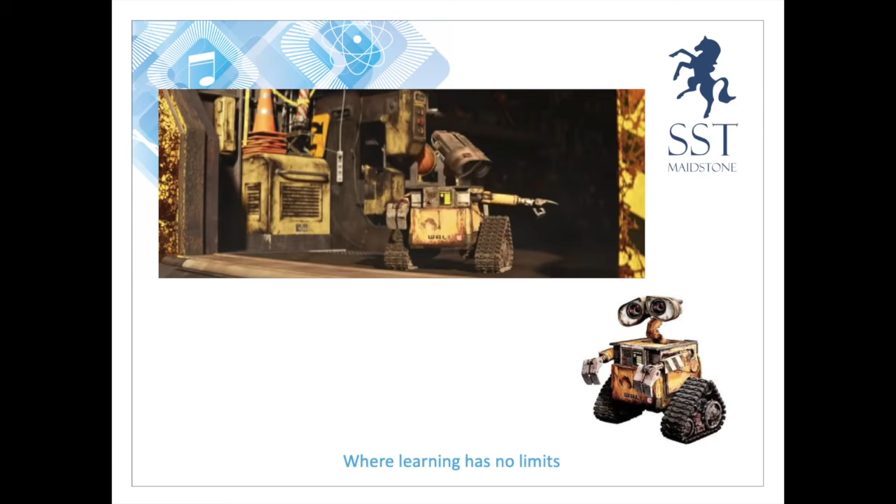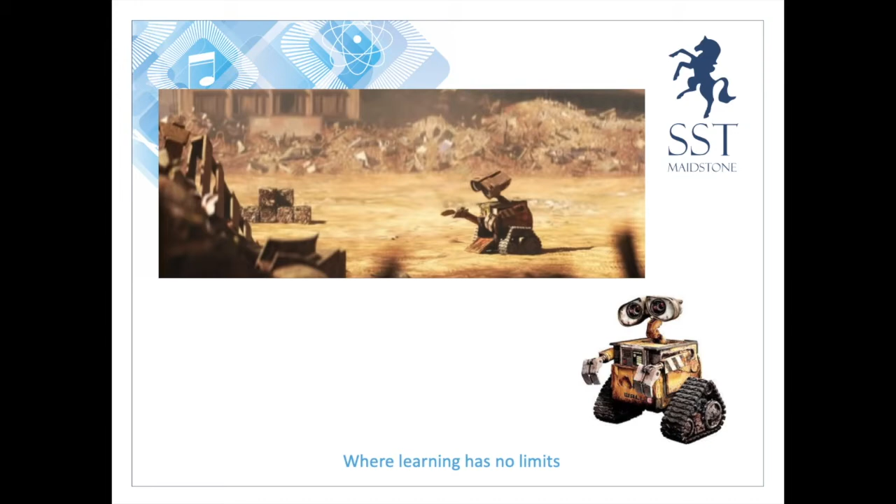This little robot is the last of his kind, and humans, in this imaginary future, messed up the planet so much that they went off in a spaceship and left it. They left these robots to clear up all the junk, and you can see WALL-E is making these cubes of junk and trying to tidy up. But unlike all the other robots, WALL-E's actually got a personality, and you can see he's interested in things, he's got a sense of humour, doesn't always know what has value and what doesn't. So if he finds something like a diamond ring, he might throw it away, as you'll see in a second. Doesn't know that the diamond's worth anything. Thinks the box is much more interesting because it has a flap on it.

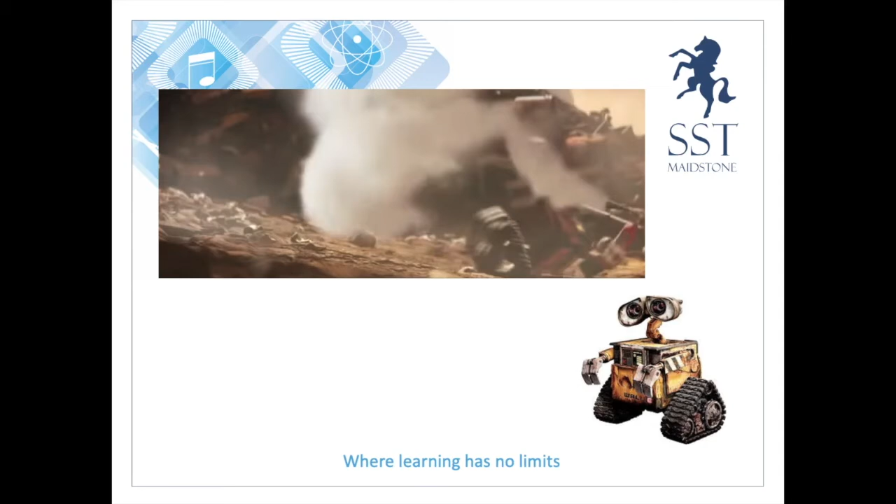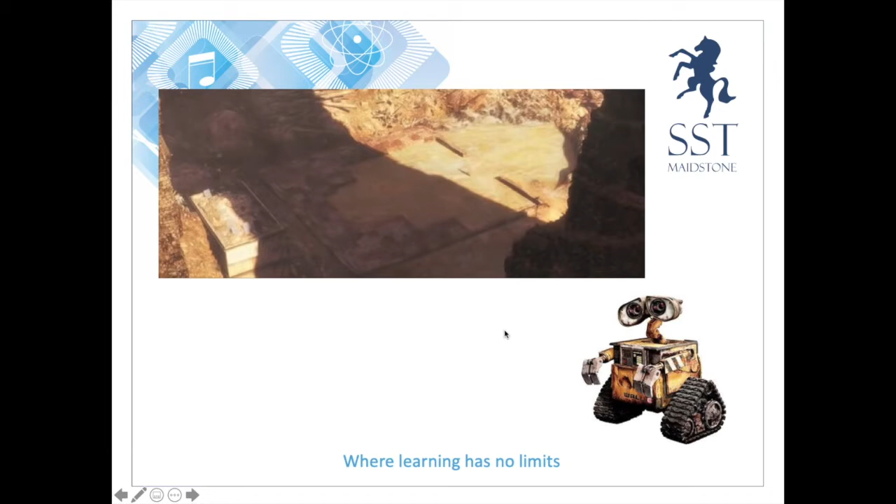WALL-E's building this massive big tower of these blocks, and he's not being affected by the pollution because he's a robot. So unlike a human being who might feel ill or have breathing problems or something, look at WALL-E continually building his tower of blocks, working all day, not needing a weekend, not needing tea breaks or anything like that.

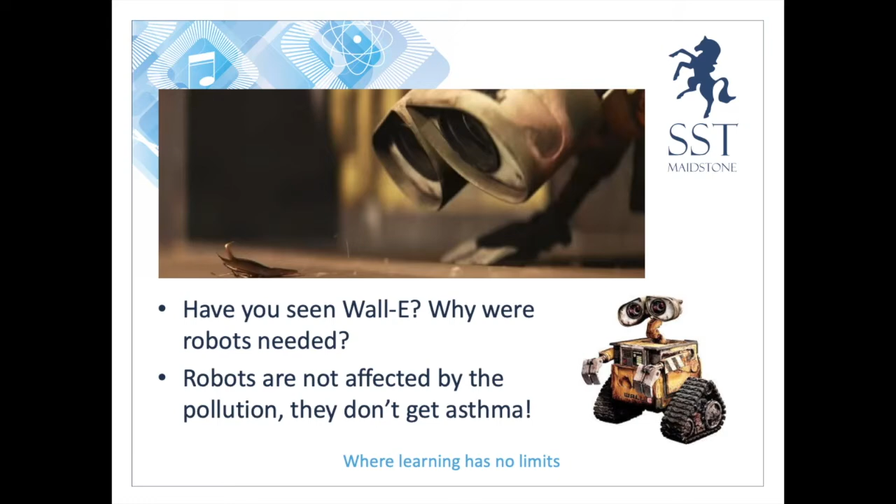So the advantage of using robots is that they're not affected by things like pollution. They don't get asthma, they don't have skin that's sensitive to different chemicals and things. So sometimes we use robots in real life for just that reason.

Another reason that you might use robots is because sometimes it's humans that can contaminate the products they're working on. Computer chips are incredibly fragile, and we humans are constantly shedding skin, so a lot of the dust in our homes is actually little bits of dead skin, and that could get into the computer chips. And we constantly secrete a little bit of oil on our fingers, so if you've ever noticed how you can sometimes leave a fingerprint on something, it doesn't mean your hands are dirty, it just means you've got this natural oil on your fingers, and if that gets into a computer chip, that can damage it as well.

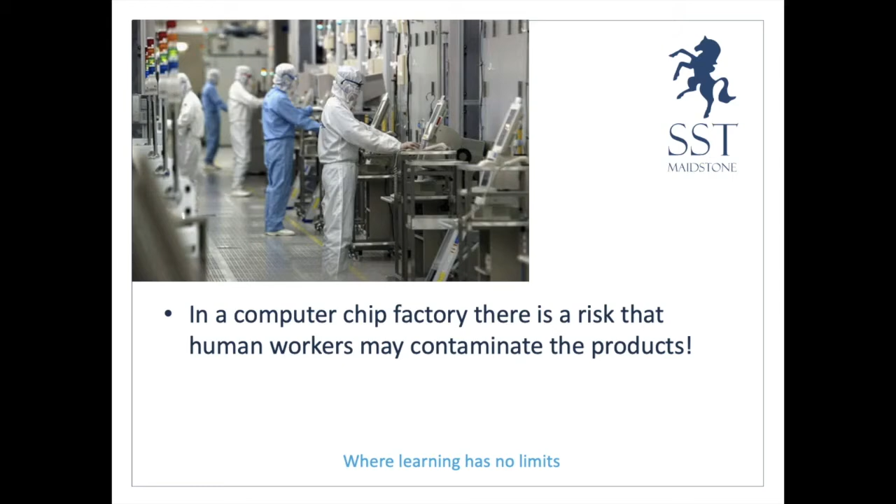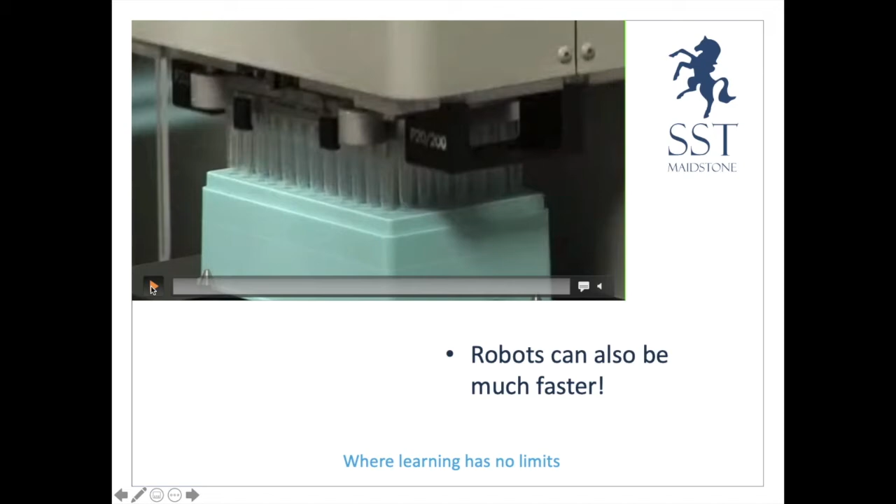So sometimes we use robots to protect ourselves, and sometimes we use robots because we might actually damage what they're working on. If we have a look at this example, here we have got a robotic setup which can very, very quickly get little bits of liquid, a little bit like we saw the scientist doing, but it can do 96 at a time.

Look how quickly it does it, and then it puts a very small amount of liquid into different places, it cleans itself, and it does it incredibly quickly. It can do in about a minute and a half what it would take the scientist maybe an hour to actually do. So much, much quicker to use a robot, much more accurate.

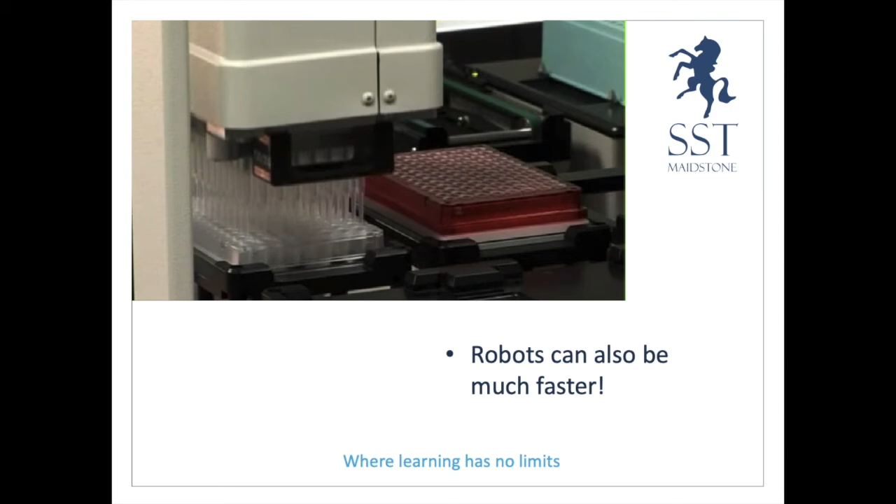Look at that, it can fill all those little tips up with liquid all at the same time. It can empty them at the same time. And of course it doesn't need a tea break, it doesn't need to have weekends off, etc. So the robot can just continue to keep on working all the way through.

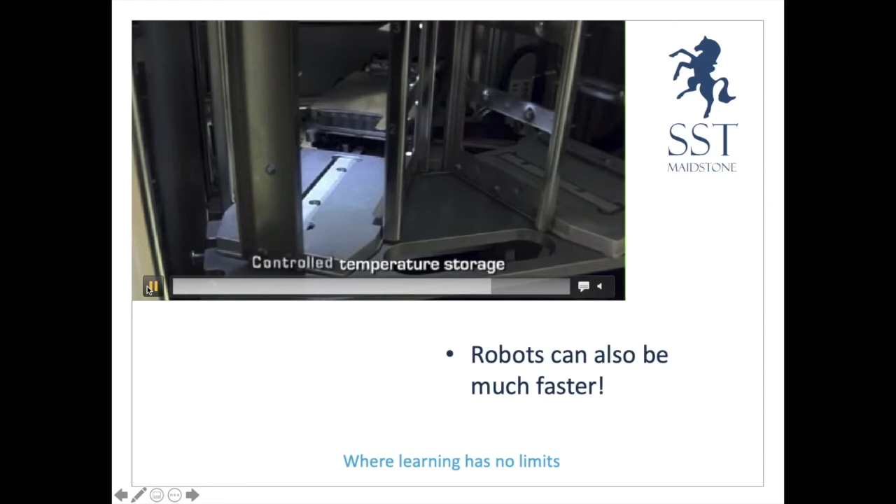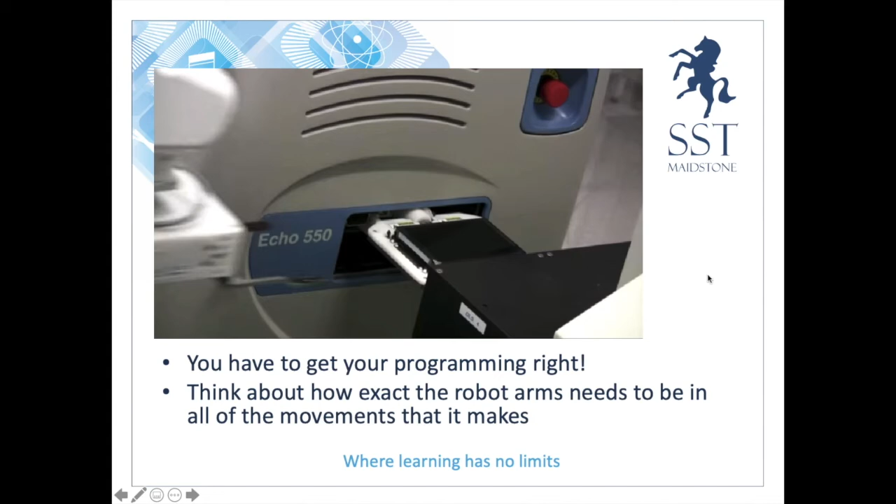This is another type of robot arm. It has to be programmed incredibly specifically, to the nearest half a millimetre. It's got to move and pick things up, pick samples up, and put them into slots like that.

If a scientist were doing this, the scientist would maybe work 6 or 7 hours in the day. This robot arm could work 24 hours every day of the week if you wanted it to. I guess it would need maintenance at some time, but you can see that the robot can continue to work.

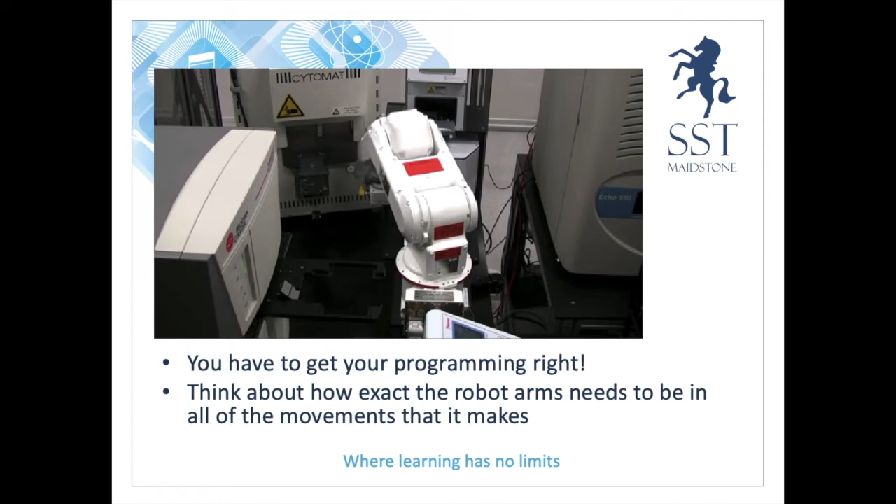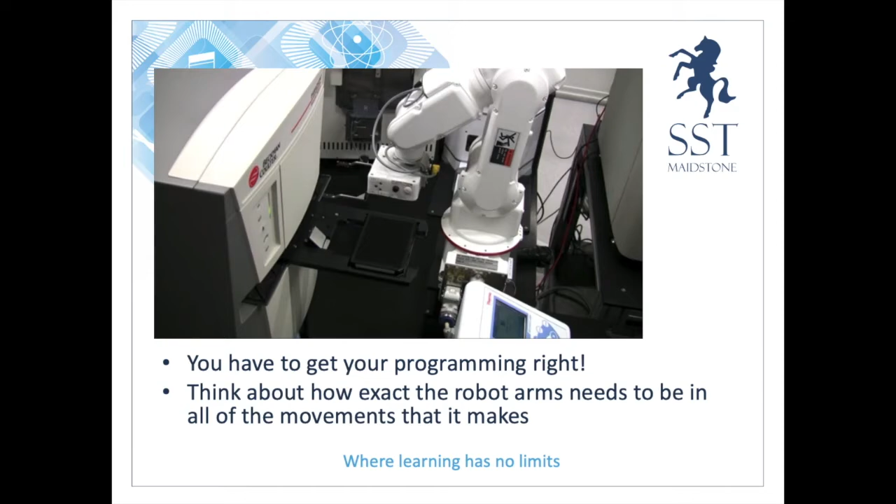It's incredibly accurate, very quick, and doesn't make mistakes generally. Also, if we're working with something dangerous like bacteria, or radioactive compounds or substances, the robot itself won't be damaged by that. So we've had a think about different ways robots might be used to help humans make things faster and keep things safe.

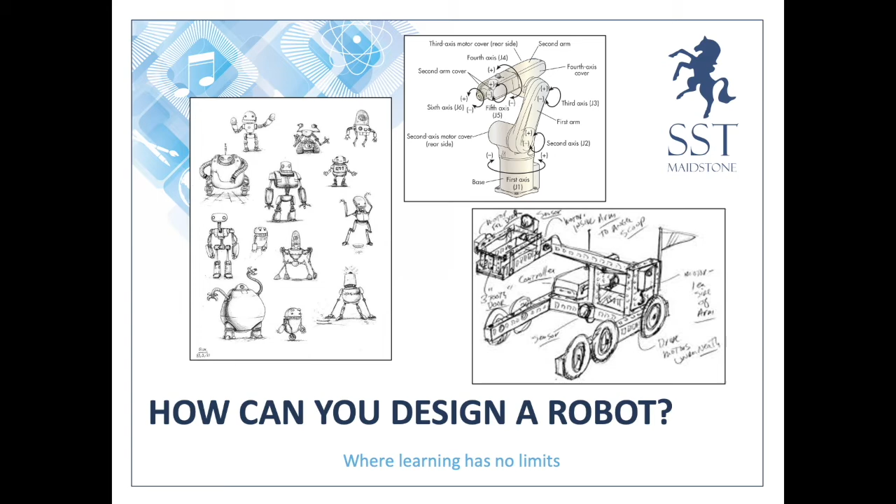Today you are going to be doing some programming of your own. Now that we've thought about the scientific reasoning behind why we need robots, our next task is going to be to design a robot. We need to think about how we could do that, starting with what we need the robot to do. Robots do all sorts of things.

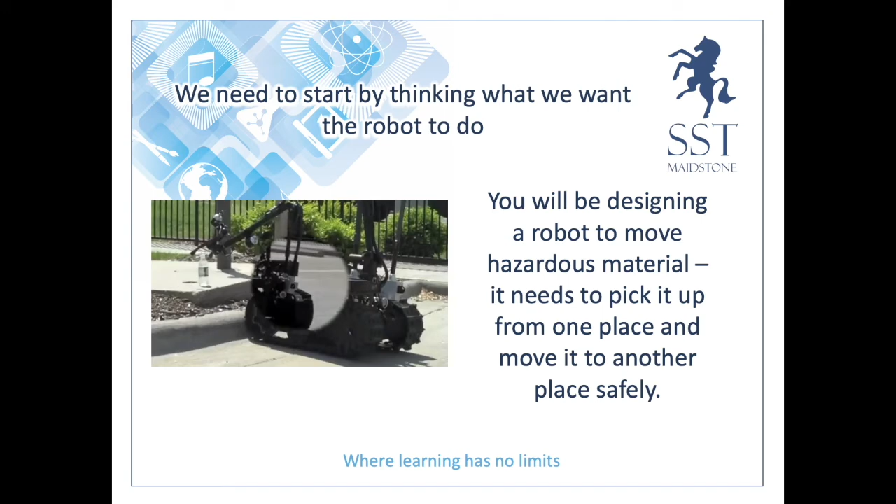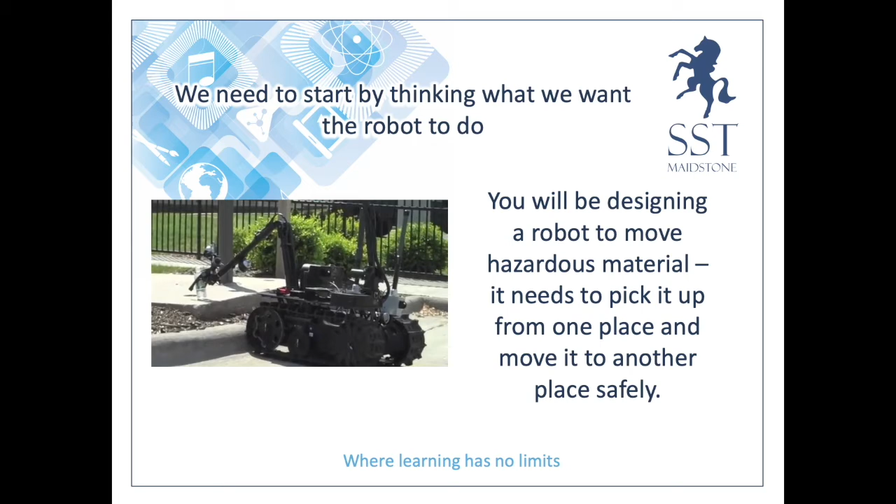You're going to be thinking about designing a robot to move hazardous material. There's one here in the video, a hazmat robot used by the fire and safety departments in the US. It needs to pick up objects from one place, move them to another, and do that safely with whatever the material is.

We've got a few things to start thinking about in order to design our robot properly. Firstly, the materials—what should the robot be made of? Think about different materials you know, and how you could use those materials to make something strong that will last in hazardous environments and be able to do its job properly.

The cost—how much should it cost to make the robot? That's going to be governed by what materials it's made of and how it's made. Think about what you want it to do and how much that should cost.

The function—what does it need to do? Thinking about the function is going to be key to what it actually does. You need to think about what you want it to do, what it's then going to look like, and how you're going to design it.

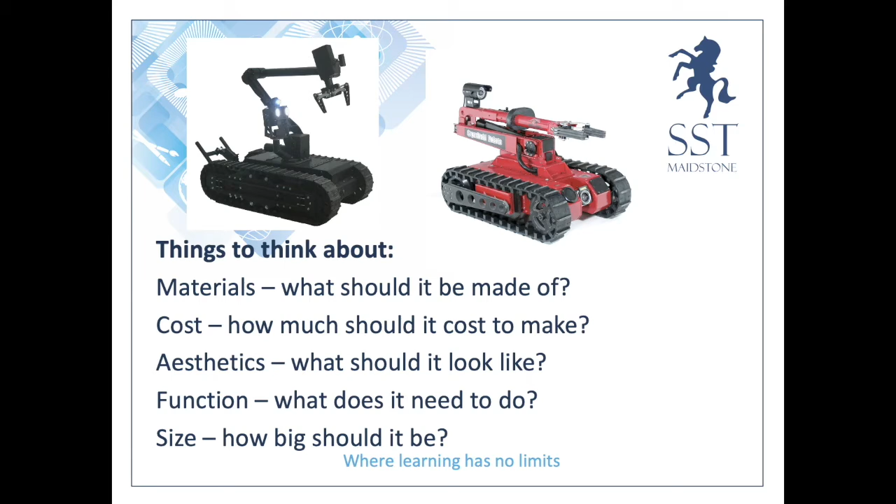Size—how big should it be? That depends on what you're thinking of moving around, and we'll leave that up to you to choose. You need to think about how big you want your robot to be.

Pause the video now, and on a piece of paper have a go at drawing a robot that meets the requirements we've just talked about. Draw your design and then annotate it—label it with details about things like the materials, the function, and the size.

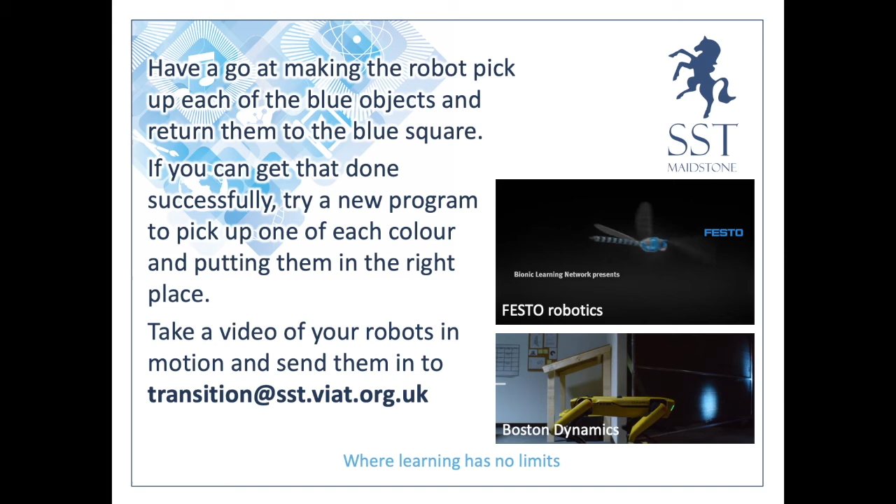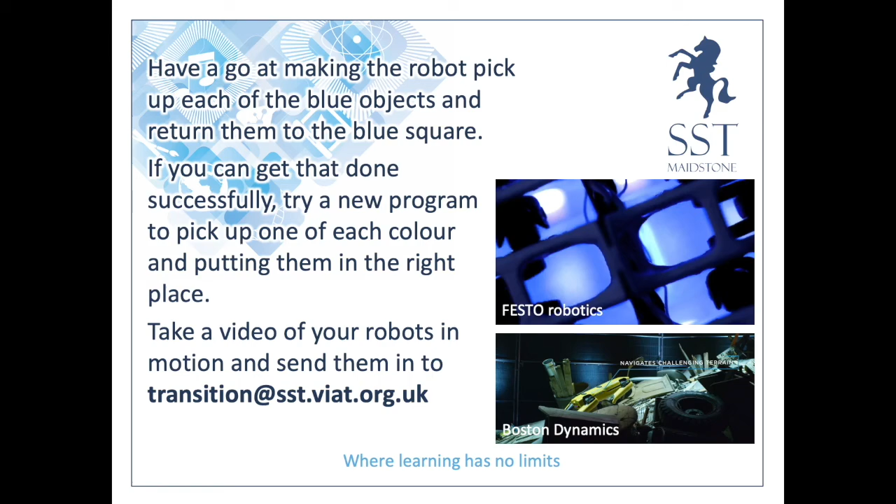So have a go yourselves at the program there on the VEX website and see if you can make the robot pick up each of the blue objects and return them to the blue square. Now you can use the same kind of pattern that I used if you like, or there are much better ways of doing that using loops and things where you can make it sense the colours and return them to the right place. So have a go at that.

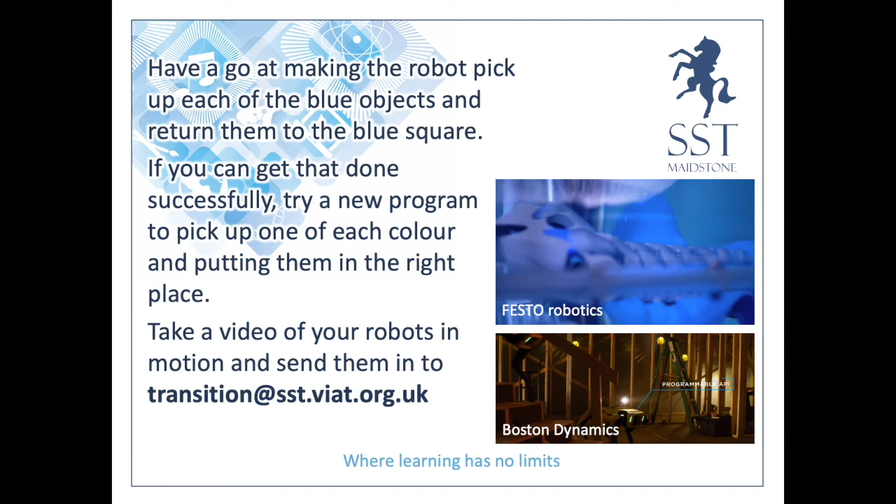If you can get that one done successfully, why not have a go at programming it to pick up one of each colour and then putting them in the right place on the grid.

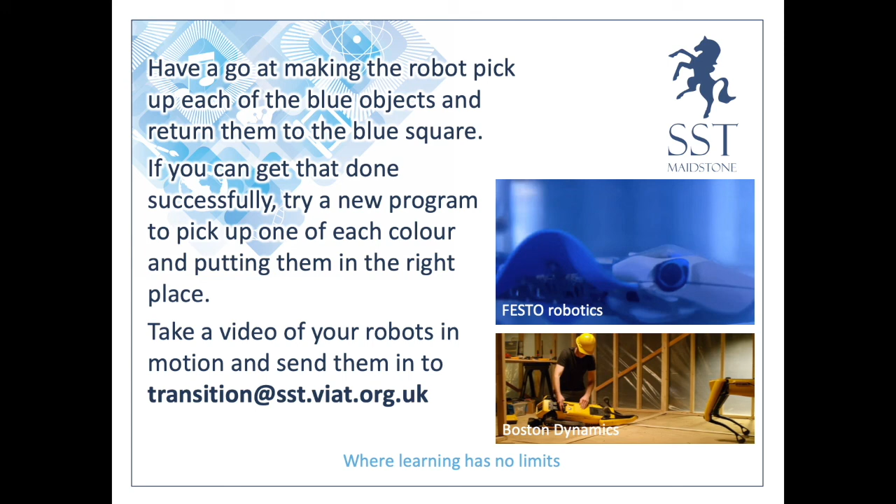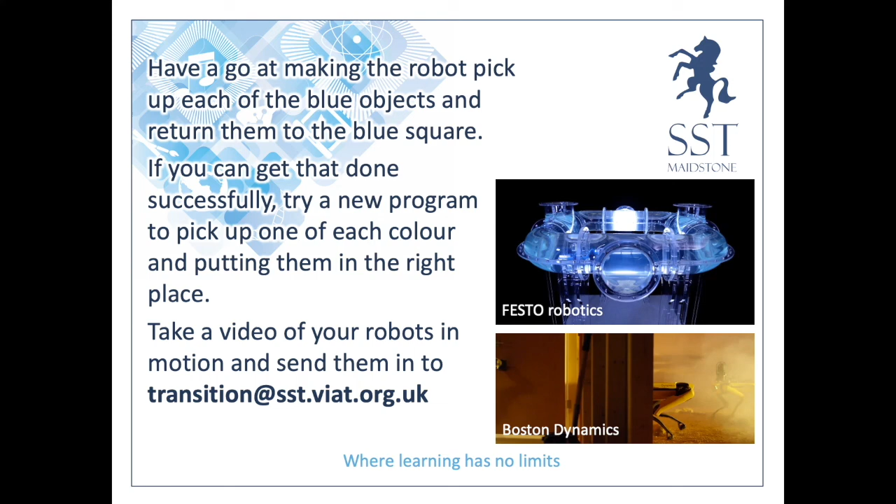If you've enjoyed looking at different robots and things, there's a couple of videos here, one from Festo Robotics, one from Boston Dynamics. Both of those are worth a search online. They do some great robots at the moment, producing lots of different things.

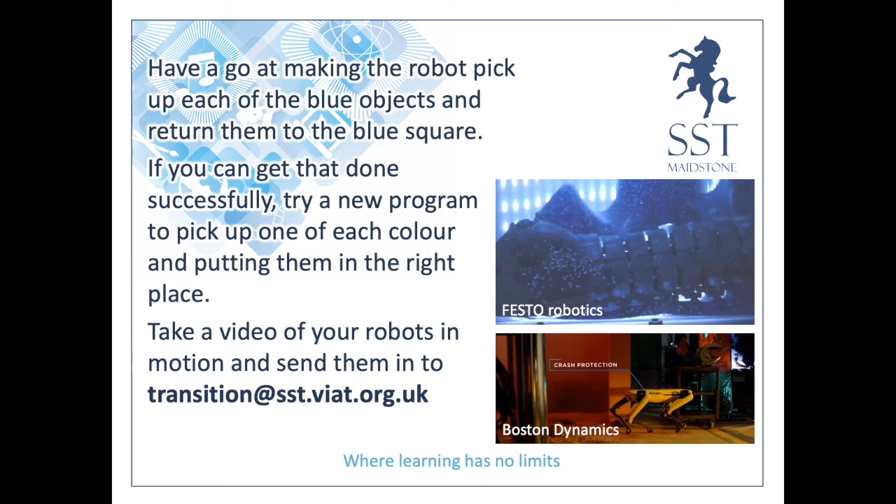Festo Robotics do what's called biomimicry, where they copy animals. So you can see there's a kind of fishy shaped one there, and they do all sorts of things. So have a look at their website. It's well worth a look.